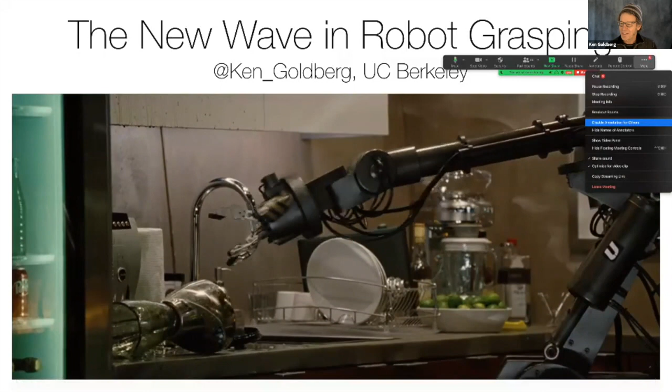Let's see, can you see the screen? Is the video moving? Uh-oh, now I'm worried something went wrong. No, I think everything is good, can you see it? Yes, everything works. Okay, great, fine. All right, thank you guys, thank you for being here.

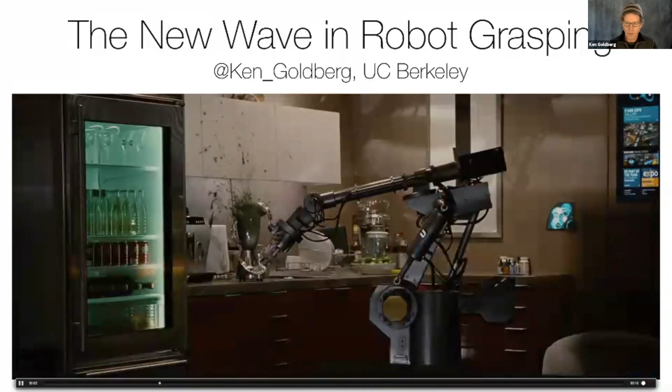So what I want to cover today is what I call the new wave in robot grasping. I always like to start with this video clip from Iron Man, and Animesh and other students have said over the years that this was a big inspiration for them to get interested in robotics. I love this scene in particular because that's kind of exactly where we are right now. Robots are still incredibly clumsy.

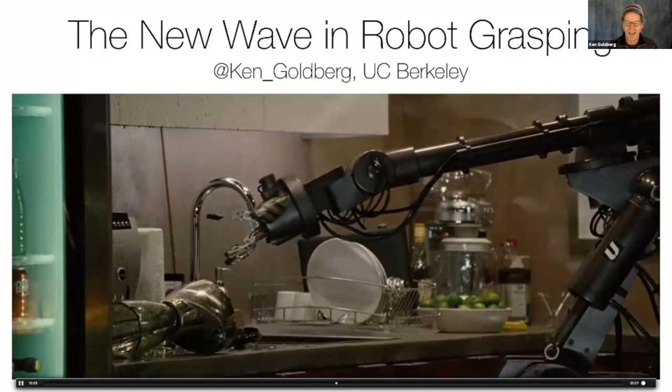So what I'll do is cover the new wave in the context of what I call the first, second, and then the new wave, and then also talk about some new projects that we're just submitting.

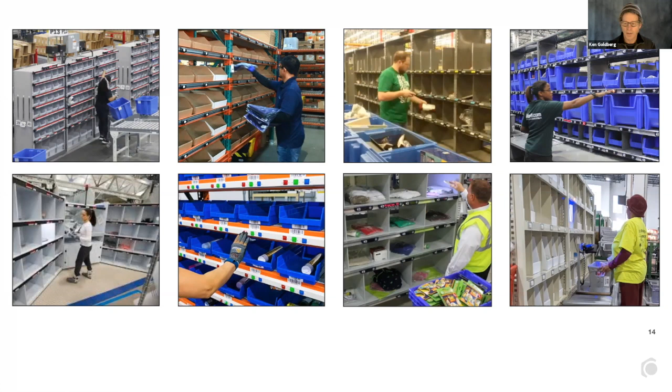Now, here's the challenge: what's behind the scenes when you order things, as most of you know, is that the orders have to be put together from these warehouses, and this is essentially a manual job. This is what it looks like in an Amazon warehouse.

And the other issue you're seeing here is the proximity. This year, because of COVID-19, people didn't want to work in these kinds of environments. They were too close, so they had to space the human workers out. So there was a real limited supply of workers and a massive increase in demand.

So the grand challenge, as Rod Brooks has put it very nicely, is that if robots could grasp arbitrary objects, anything you put in front of them, like you see here, this is what you see in a warehouse, if we could do this, it would have significant impact in factories, homes, and warehouses.

Now, let me address the issue of hardware for a moment. I know there's really interesting and exciting work going on in robot grasping with hand design, but I want to argue in favor of very simple hands.

This is the classic parallel jaw gripper. It's the workhorse of robot end effectors, and it can actually do almost anything.

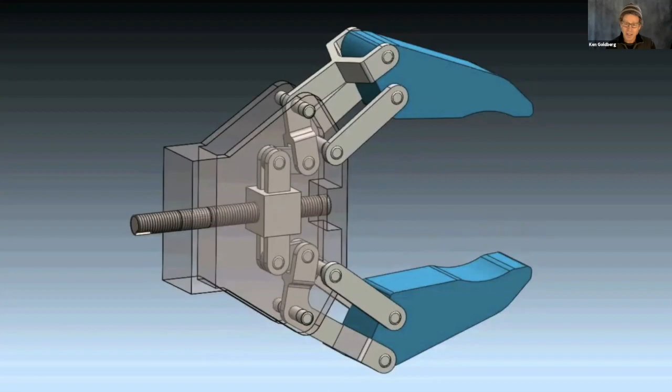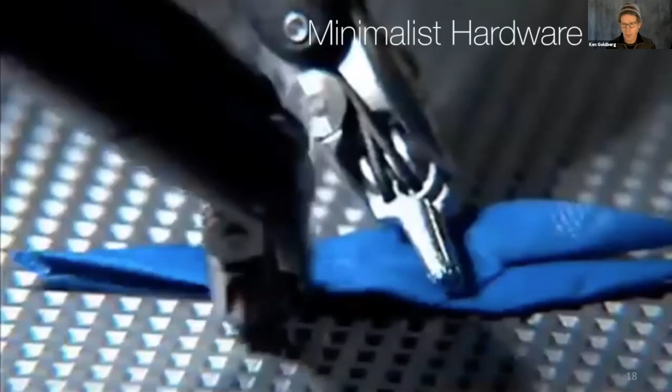...irregularly shaped objects. Now, another thing I want to talk about is sensing. A big change in the last decade is in depth sensing, and as you know, LiDAR has had an enormous effect on work in self-driving vehicles.

It's also being used in this problem of warehouse grasping. And I just want to point out that it is an important advance, but it's not a silver bullet.

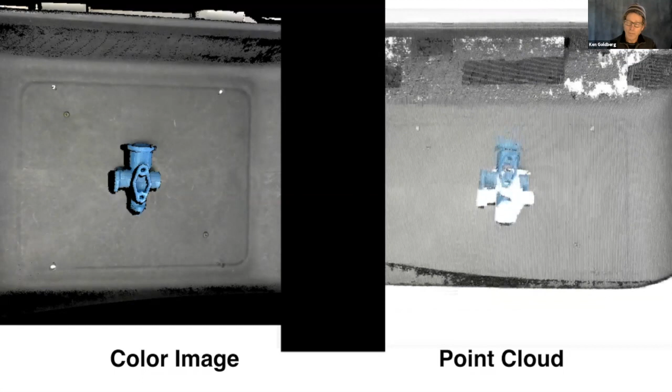So if you look at the image on the right, I just want to show you that the point clouds you get out of a typical depth sensor are not perfect. There are gaps and holes, and this is due to the light not reflecting in the way that it might be expected. This is exaggerated when there are areas of high curvature, transparencies, or specularities in metallic objects.

So that's a big problem and something we have to overcome. Another problem is the physics. So let me illustrate that.

This is due to the uncertainty in the underlying surface friction. I would even say it's non-stationary, because as you're pushing the object, it encounters different aspects of the surface friction. This is a very, very minute change.

Just a grain of sand under there will cause a dramatic difference in the final orientation of the object. Now, I want to say that this is a hard problem. We can predict the motion of an asteroid a million miles away far better than we can predict the motion of pushing an object across a table.

In fact, I would even go so far as to say this is an undecidable problem. Knowing how the object is going to react is not something that with better information we can resolve. It's aleatory uncertainty. It is undecidable.

Okay, so with all that, this is the challenge: we want robots to come in and clean up after a dinner party, but let me give you a sense of what it's like to be a robot.

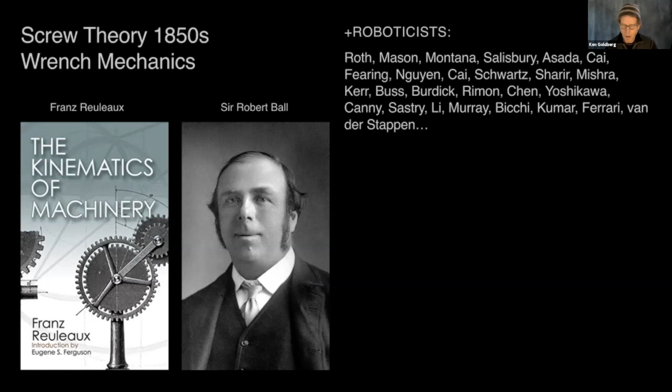What I call the first wave was really very consistent with Plato. It starts with axioms and tries to deduce models of reality. This goes all the way back to the 1850s, even further, with the great mechanicians who were designing clocks and other devices and had to understand the kinematics of machinery, wrench mechanics, etc. Many roboticists followed in their footsteps to develop analogous models for robots. I had the good fortune to work with Ruzena Bajcsy and Shankar Sastry, who wrote the foundational textbook on robot manipulation, a wonderful book many of you are familiar with, that goes into great detail on these models. They're analytic methods that look at the placement of all the forces, torques, and surface normals, and then make a binary decision whether or not the object will be held securely.

So for some state of the contacts and the grippers, there is an outcome: either the object is immobilized or it is not. What we want to do is find a configuration of the contacts that will immobilize the object. That's what I'm showing with U star there.

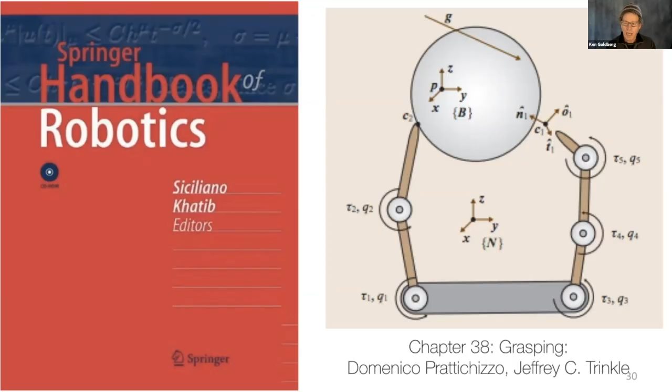Now, if you go into the Handbook of Robotics, the recent edition, there's a chapter on robot grasping. It's a great chapter, covers this very nicely, about 40 pages. If you get to the very end, you'll find a sentence: when a robot identifies an object to grasp, its knowledge of the object's pose and geometry are not perfect. This is only mentioned at the very end of the 40-page chapter. I consider this one of the greatest understatements of all time. This is such a huge matter, but it's totally not considered until the very end.

And this is the uncertainty that I'm talking about. The first wave essentially ignores it. It says, we know everything, we know the exact precise shape of the object, we know where all the contacts are. That's what allows us to develop this beautiful mathematical machinery that can determine where things are. But that doesn't quite work.

We started developing a model to capture this uncertainty, and this was the beginning of Jeff Mahler's PhD thesis. He's contemporary with Animesh, and Animesh was involved in some of this work as well. We call it the Dexterity Network, for a reason I'll explain, or DexNet.

The idea is that there is uncertainty, so we're going to treat it in a statistical way. We're going to consider all these variables as random variables, and now we have a graphical model where we can talk about the sources of uncertainty. We have distributions around the true pose of the object, the shape of the object, where the gripper contacts are, which will be determined by the gripper and the shape. The surface normals will be determined by that. The center of mass is also not known precisely. The frictional coefficients are not known and they're changing. All this leads to uncertainty in the precise forces and torques on the object, which will affect whether or not a particular commanded grasp will be successful.

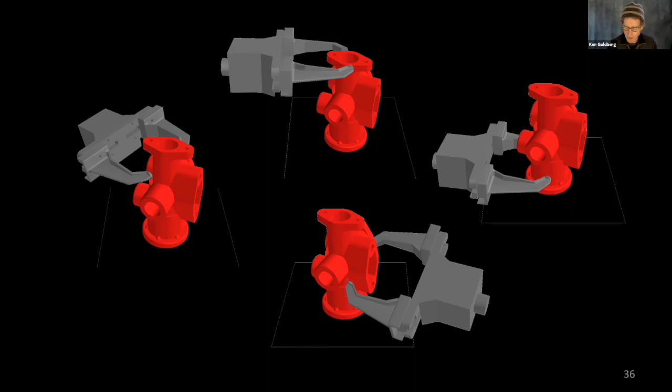What I mean by that is shown here. I have a nominal grasp, and what I'm doing is starting to look at small perturbations on that grasp and sampling from these distributions. So I'm varying the pose of the object, the pose of the gripper, the center of mass, and all of these variables.

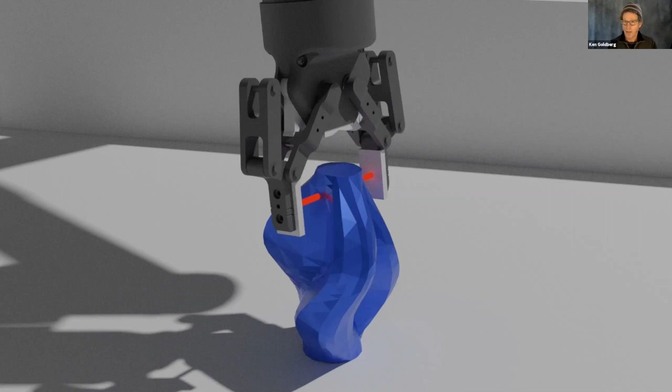For each one, I'm checking whether it will succeed, using classic wrench mechanics. So I'm not throwing that away, I'm using it, but in a stochastic model. We check across a number of samples, and basically do a version of Monte Carlo integration to estimate the probability of success for a particular nominal grasp.

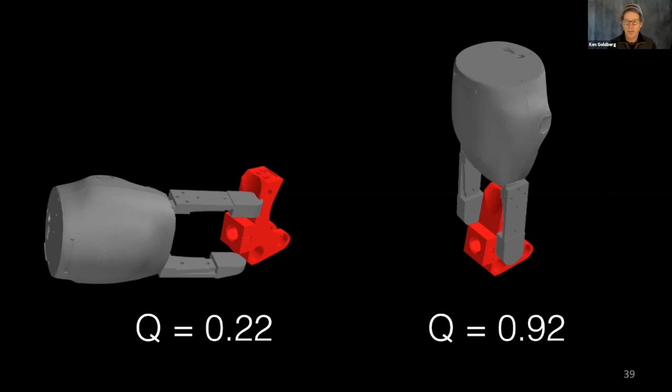So the outcome might be something like this, where on the left we have a very low probability of success, and on the right a very high probability of success. Hopefully that's intuitive, because the one on the left is such that a very small error will cause the part to move away, whereas the one on the right is almost self-aligning. It tends to close in and scoop up the part even if there's small uncertainty, so that's why it has a high probability of success.

We implemented this in what we call DexNet 1.0. The idea was we took images using depth cameras, estimated the state of the pose of the object, that's X, and then applied the Monte Carlo analysis to find the best grasp, the one with the highest probability of success. Let me show you it working.

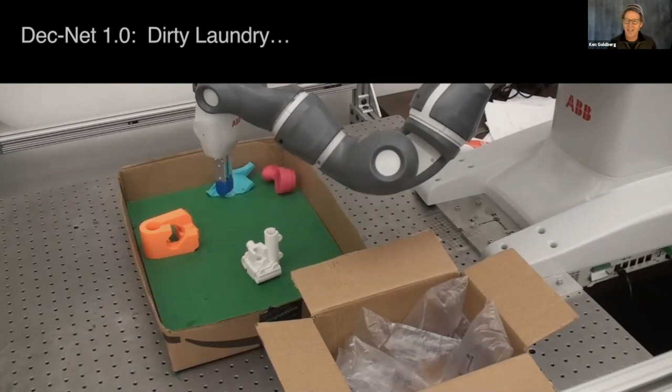So not so much. All right, what happened? Well, the problem here is that it computed a beautiful, robust grasp, but the state was wrong. It thinks the object was in a different configuration, and it executes a perfectly robust grasp, but for the wrong state. So this does not always work.

And the issue is perception uncertainty. Now we have another issue we really want to model. Remember, we started with the 3D camera image and used that to estimate state, but we have to learn a better way to do that, more systematically. So now, given an observation Y, which is a point cloud or depth map, I want to plan the grasp that will maximize the robustness, or probability of success. This leads us to the second wave, where uncertainty in perception comes in.

This is where the distinction between Plato and Aristotle comes back, because Aristotle was arguing in favor of a different approach to making progress in the world: to look at all the plants and animals and rocks and minerals and build up models from data. His point was collect data, and that is essentially the root of the contemporary wave in artificial intelligence, deep learning. It's data driven, and it's been extremely successful.

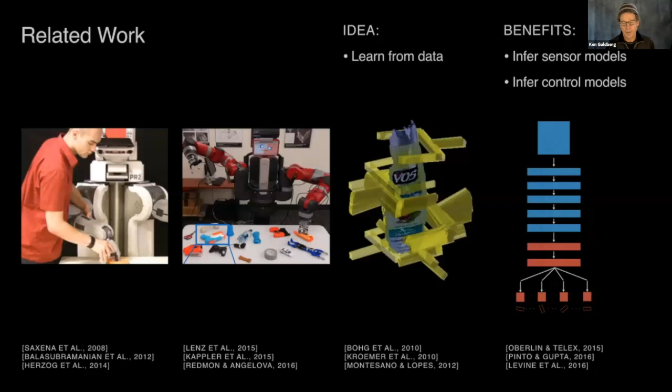A number of researchers have been applying that to robot grasping, and it's accelerated over the last decade. One of the most natural sources is to look at real examples, to learn from experience in the real world. These can be either human labeled or self-supervised.

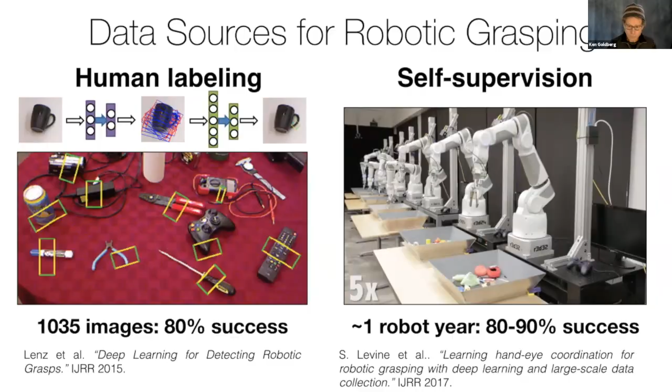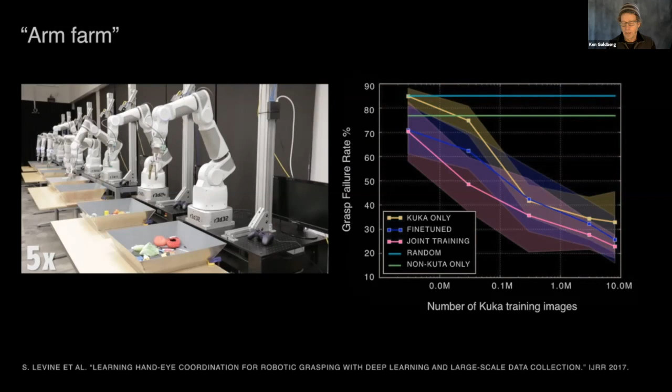You're probably familiar with the arm farm at Google that set up 14 robots to work around the clock to acquire data on grasping. One thing I want to point out is that in the published results, as it learns, this is a learning curve, it's able to reduce the failure rate, as shown on the right. But if you look closely, on this log scale, after about 10 million observations or examples, the system is at about 20% failure rate.

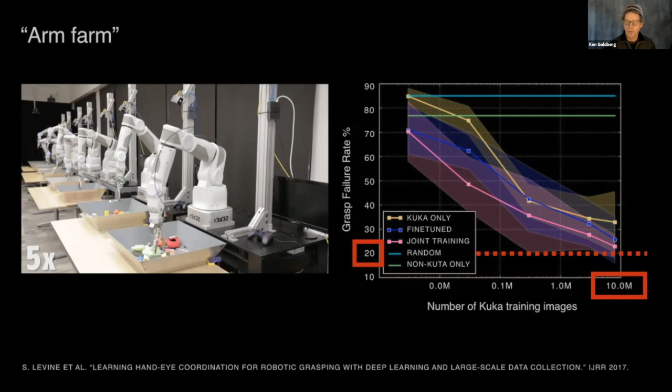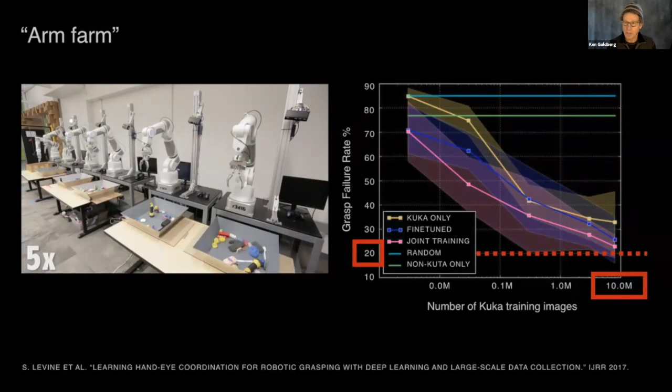If you try to extrapolate, it looks like at 10 million, that's a year's worth of round-the-clock data collection. So if you want to get down to 90%, you're going to need another 10 years of data collection. And if you want to drive it down to 95%, you might be looking at 100 years. So my point is that with this approach, the system, by collecting data, needs a great amount of data. Now, speaking of data, let's look at the example of computer vision.

ImageNet was the big example. It was a huge breakthrough. Fei-Fei Li and her colleagues developed this ImageNet, this data set of millions and millions of images, but they were hand labeled, drawing bounding boxes around objects and then labeling what those objects were.

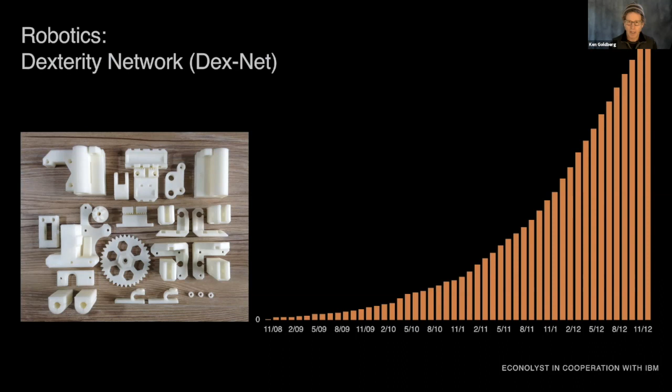So I'm curious, my hypothesis is, could we do something similar with robotics? Instead of ImageNet, we'll call it DexNet. The idea is to come up with lots of labeled examples. In this case, we're labeling them not with a name of an object like a necktie, but labeling the objects with robust grasps that we're pre-computing.

This is the analogy: can we generate a very large data set that would get us to a critical mass where we could start to see the system generalizing to new objects. In the same way that ImageNet reached a critical mass, once you had that, you could learn a very large neural model, a convolutional neural net, that would then be able to generalize to new examples.

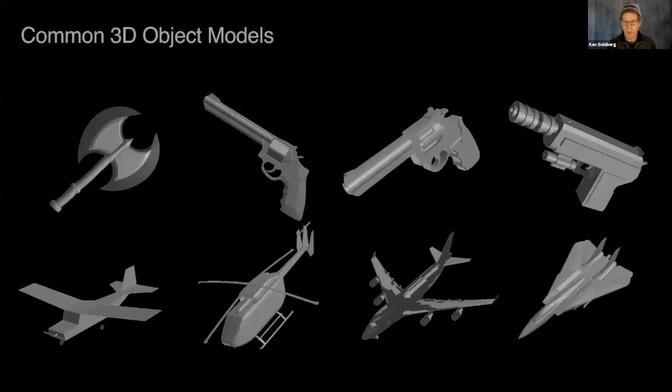So we set out to do this, and the good news is that there's a lot of 3D models out there. One reason is that a lot of people are publishing 3D models for gaming. So when you look out there, you'll find lots and lots of weapons and aircraft. We have plenty of those, but those are not very commonly found in warehouses.

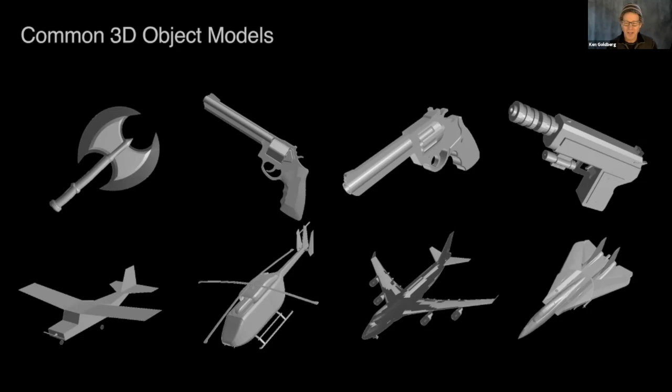So we had to go out and really curate a data set of three-dimensional objects that were more natural in, let's say, warehouse and home environments. So we found objects like these. We cleaned them up, made them watertight so that the surface normal properties are correct, made them into regular solids, etc., and scaled them by a number of factors. This was a fairly long process.

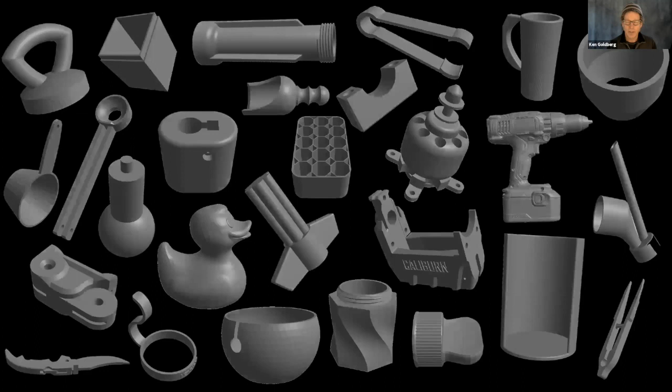We also augmented the data with blister packs. This is very common in warehousing and retail, where you have objects attached to a piece of cardboard. So it's very easy to add that piece of planar surface onto the object and then use that as a new object.

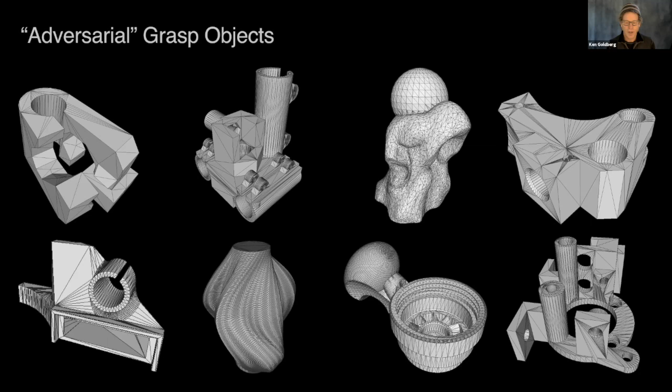We also looked at what we call adversarial objects. This, again, is somewhat inspired by work going on in adversarial computer vision, where they come up with examples that are very difficult. Here we wanted to find objects that were difficult to grasp, not obvious. So it took some time to find these kind of objects, but we've been collecting them.

And then we put them together into a big network because we want to understand relationships between them. So this leads us to the new wave, and I want to do a quick shout out.

To a book that came out this year. It's called How to Train Your Robot, and it's available for free online on my webpage. My daughter Blooma is the first author. She's a very good negotiator—she wanted to make sure she was first author on this book. It really tells the story about getting kids interested in robots.

There's a scene in there that basically tells the story about DexNet learning how to grasp objects. In particular, trying to explain it to kids, we came up with the analogy that it's like the robot was dreaming about how to grasp objects. And that's how it learned—in other words, not doing it physically, but dreaming about it.

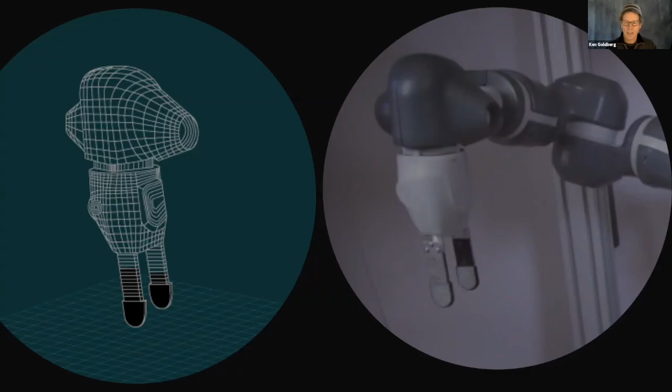So what I want to say is that the important distinction here is that we're now performing the grasps in simulation and then learning from many of the simulated examples rather than doing them with real robots.

So that can actually be parallelized very nicely. We did that—we put it on AWS and spread them out. Then you could actually do this kind of computation overnight. Now, we also wanted to speed it up a little bit.

Now, just a quick detour here. We found a fun idea, which was to use multi-arm bandits to bootstrap this. The idea is to make use of similarity between objects and between grasps. There's this idea of correlated bandits, and the key idea is you first have to identify when you have two similar objects.

So we built a network to do that, building on this new, at that time, idea of multi-view deep convolutional neural nets, where you take a lot of synthetic views of an object and train a network to identify the object from different views and cluster those views together as a similar object. That worked very well.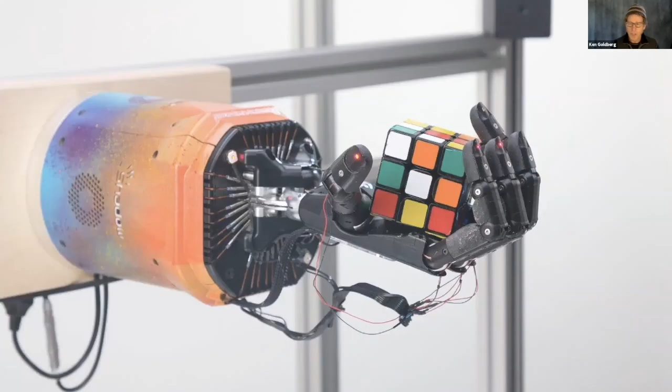Now you may be familiar with the advance from OpenAI - they developed the shadow hand robot performing and manipulating a Rubik's Cube. As you know, it's a very extensive process using simulation like we have been doing. They also adopted a technique we've been doing, which they call domain randomization. This is exactly what we talked about earlier - they want to randomize the system and give it lots of variation. This is essentially a key trick to crossing what you might call the reality gap from sim to real.

So the idea is you have to inject noise. You have to make the system robust in simulation if it has any hope of working in reality. We do this in terms of both the control and the sensing. So we generate 3D depth maps and inject noise into them that's consistent with the noise properties of the cameras we use - not just random noise. I really believe in structured domain randomization, where the noise you inject actually has the properties of your real system, your real sensors, and your real controllers. What we get out of that is a data set.

This is the set where you have combinations of an input image Y, a grasp configuration U, and R, the estimate of the robustness of that grasp. Those triplets are generated, and using the cloud, they can be generated fairly quickly, giving you millions of examples - both positive examples, grasps with a high probability of success, and negative examples, grasps that don't succeed. Then we take all that data and train a deep network, tuning the parameters in this large vector theta to minimize the loss between its output and the outputs measured in the data set.

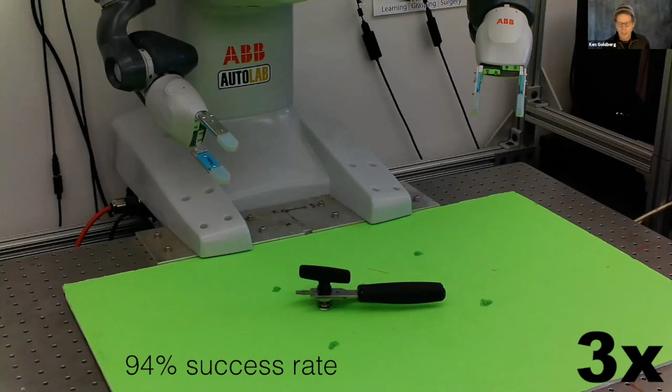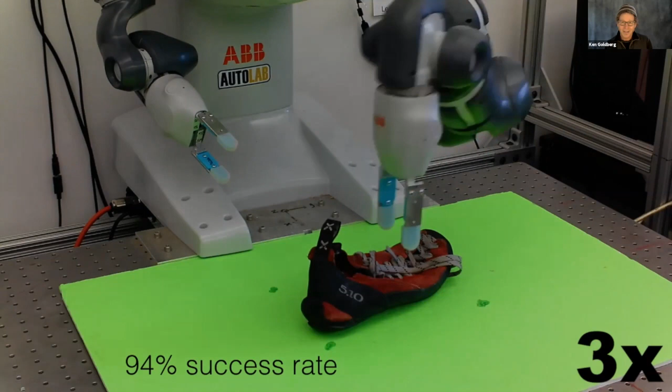It was very surprising, and I have to say this: when Jeff called me into the lab and said, look at how well this is doing, I was surprised. These are objects it was not trained on, and it actually performs surprisingly well.

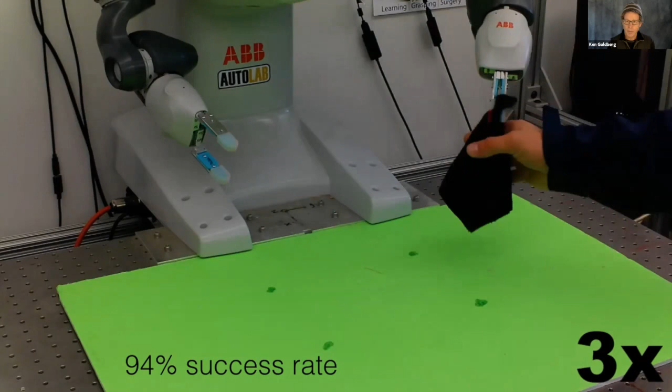And by the way, all the objects it was trained on were rigid, so it's starting to pick up things that were non-rigid. So it was generalizing very well, and that got us very excited.

So the next thing Jeff did was extend it to bin picking, which is a notoriously difficult problem, where not only do you not have just one object in isolation, but you have a heap of objects in a bin. What he did was the same thing: train it on synthetic bins. Again, like dreaming, not about picking up one object, but dreaming about bins and picking up objects out of bins. You could train it very analogously.

So this is the output. On the left, you see the color image. Next, you see the image of all the candidate grasps that it selected, and then it's iterating, basically feeding those through the network to choose better ones using cross entropy to optimize. On the right, it finds the grasp it believes has the highest probability of success in that cluttered bin.

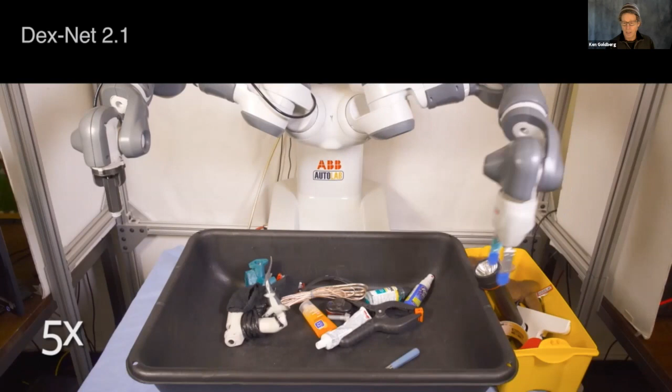And so here we go. Now it's actually working in bins, and we call this Dex-Net 2.1, and it's able to pick things up. Again, none of these have been trained on. They're all novel objects, and some of them are deformable.

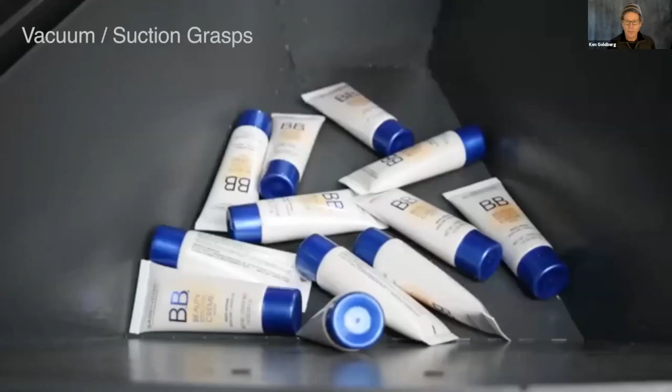So we released this. We got some really nice coverage in the press, and companies started to approach us about incorporating it. One of the things they pointed out was that they use a different kind of gripper, the suction cup. And remember, I was making a big point about simplicity - we were always using the parallel jaw gripper, which has two contacts. Well, the suction cup only has one.

So it turns out that's what we call unicontact grasping, and we just hadn't really considered that. So we started looking into it, and we were surprised that there was very little literature on unicontact grasping and suction cups.

In other words, to really model the physics, analogous to the beautiful literature we had found for contact with parallel jaw or multi-fingered hands. It may be out there - we still haven't found it. So if some of you are aware of it, please share it with us. But we started to develop our own.

So the first step was to try to model the physics of the vacuum cup itself and the seal of the vacuum, which had to do with the local surface geometry. Generally it's not planar, so you have to look at how much it varies from planar, and then look at the conformation of the suction cup.

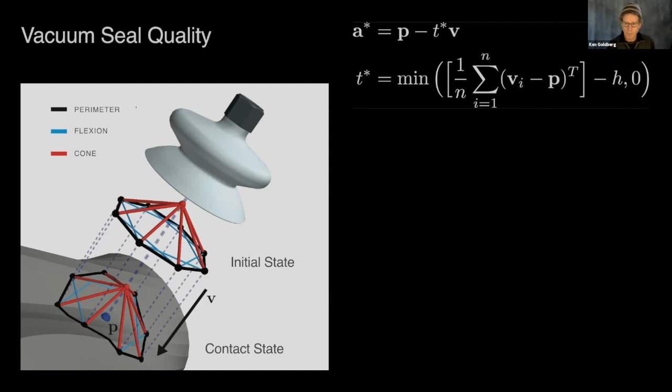And then you also have to think about a new model of the wrench mechanics, because suction cups are different than finger joints or contact between two jaws - here you have the ability to resist forces orthogonal to the suction, but actually very poor ability to resist torques that will peel the suction cup off. So we had to model all that, and then once we had that, we have a new analytic model, and we can train on lots and lots of synthetic examples.

So as you see on the left is a candidate suction grasp point on this object. We look at all the perturbations, just as we did with parallel jaw grippers, and on the right it's computed a map of the robustness of different contact points for the suction cup. It makes intuitive sense that these points in green are better places to put your suction cup - they have higher probability of a successful grasp.

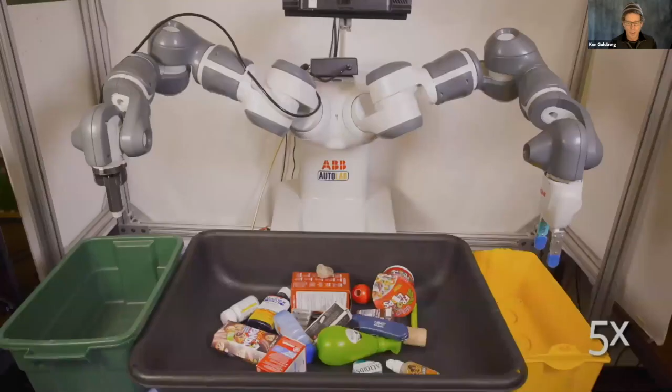And in a bin, again, we did this in the bin context as well - it's looking for points that have a high probability of success for a suction grasp. And then we put these together. We call this ambidextrous, where the robot has two different kinds of grippers: a suction cup on one hand and the parallel jaw gripper on the other. The suction cup can pick up a lot of objects, as you see here, but now we want to have them both working.

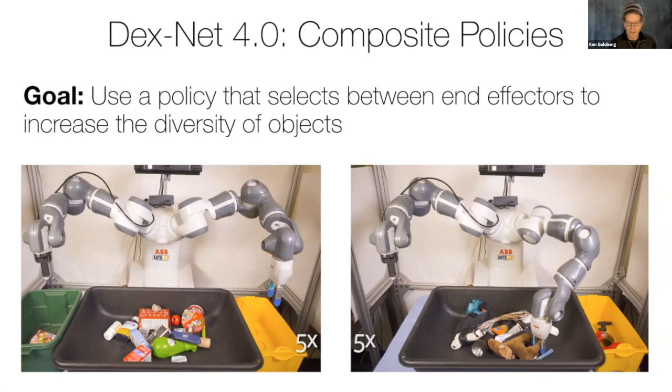So we call this composite policies that use both of these two modalities. And the key there is to put them into a common reward function, because you have to normalize these estimates.

That took a little bit of time, but basically you can see on the left, this is characterizing the grasp axes that will determine the probability of success. And on the right, the suction probabilities and how probable they are. Then we can essentially at any given time make a decision which of the two modalities has the higher probability and execute that one.

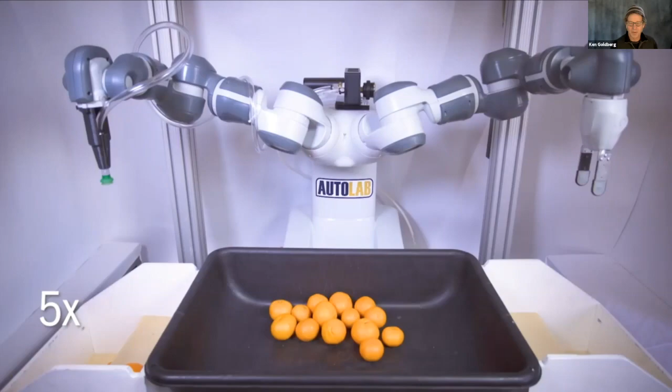So now the suction is trying to pick up things, and the gripper is trying to pick up what it thinks it can. And it doesn't always work. So the suction can't see that this object is porous, but then it knows to be able to send over the parallel jaw gripper.

This has been very, very fun to watch this evolve. We have a paper on this in Science Robotics, looking at this ambidextrous model.

But we have also started a company, and so Jeff and three other students in the lab co-founded Ambidextrous Robotics, and our motto is getting a grip on reality. We're actually coming out of stealth mode at the end of this month. So if you're interested in learning more about that, please get in touch with me.

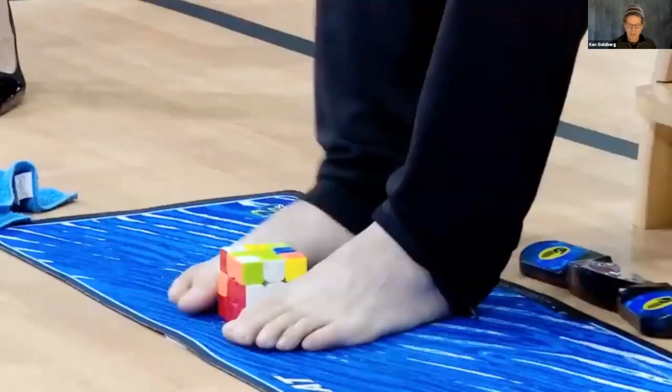And so we're making progress, but there's still many more open research problems. By the way, if anyone really doubts that robots are going to take over and that humans are doomed, I'm not worried about that. As you can see here, human manipulation abilities are quite impressive.

Okay, so now I'll just touch on a couple new projects, and then we'll open up for questions. I'm really curious to hear questions from you.

New projects, well, we have another paper that came out in November, and this is Jeff Ichnowski's work. He's a postdoc, and he's been working on the second problem, which is once you have the object grasped, how do you move it very rapidly into a new location? It turns out that you want to do that with minimal jerk motions, but computing the minimal jerk motion is prohibitively time consuming, so you actually spend more time computing the minimal jerk than you save in performing it.

But he was able to try something really exciting where he could generate lots of examples, again in simulation, and then use that to build a neural network to estimate the minimum jerk trajectory. That then provides a warm start for an analytic method that actually optimizes, and that turned out to give a dramatic speedup. So what used to take on the order of 10 or 20 seconds, he got down to 80 milliseconds, so it's now practical for industry.

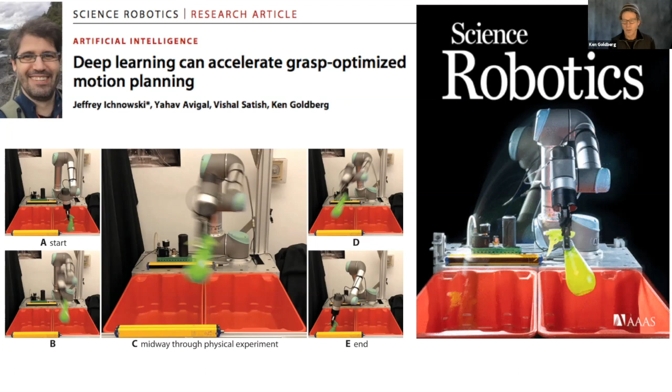Another project I'm excited about has actually been led by two undergrads, Jennifer and Priya, who are tackling the problem of untangling cables. This is a real problem in many homes, certainly, but also in a lot of industrial environments and repair shops and in boating, etc. And it turns out there's some really nice theory out there for essentially how to model knots, but it's essentially graphical. So the trick is, how do we then get to the graph?

It's actually a surgical arm, picking up and basically loosening and untying these kinds of knots. We're also looking at dynamic cables. We were inspired by one of my favorite movies, Raiders of the Lost Ark, and we have a paper at ICRA in May that we're calling Robots of the Lost Arc.

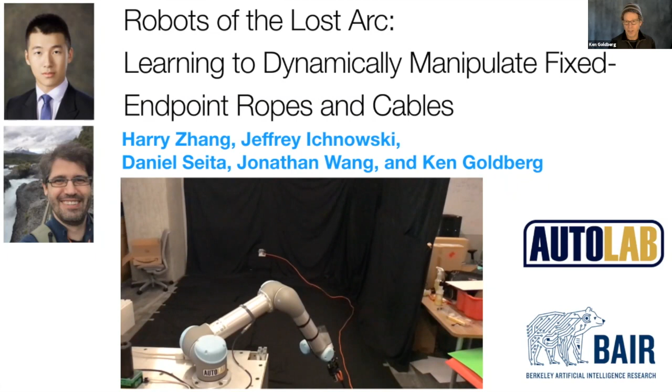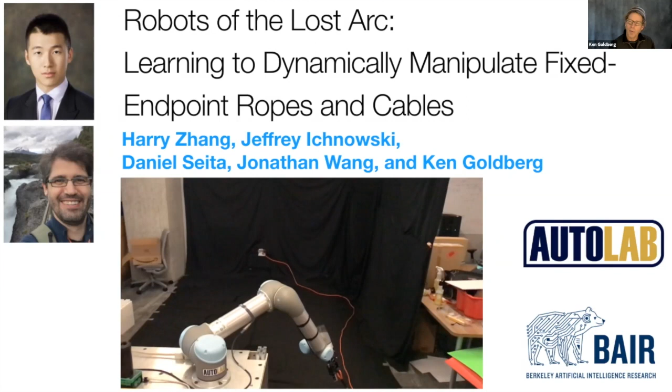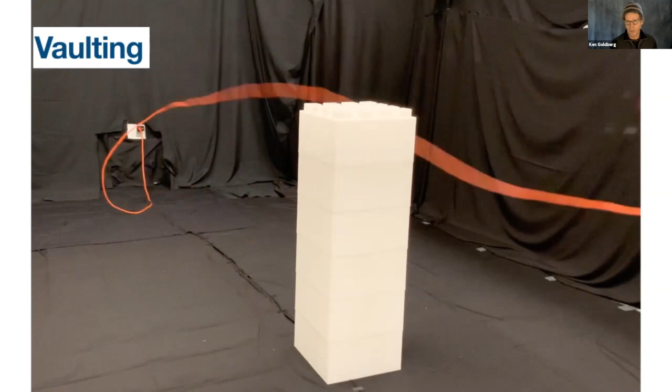The idea is to manipulate fixed endpoint cables. Imagine you're vacuuming and the power cord gets stuck, and you have to flip it to get around a chair. People do this all the time, but can we get a robot to do it? We want the robot to perform tasks like vaulting over an obstacle. We also look at knocking, where we place an object on an obstacle and want it knocked over, or weaving, which arranges the cable between multiple obstacles.

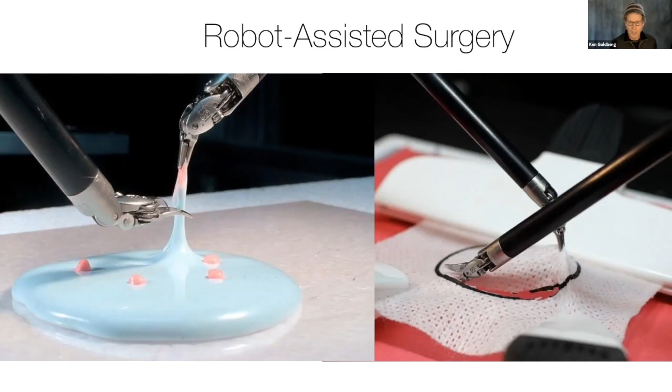We're also working on robot-assisted surgery, and Animesh did a lot of this work when he was in the lab, and it's ongoing. We're looking at things like debridement, especially in environments that may be deformable, as mentioned earlier. We have a Da Vinci robot arm in the lab that we use regularly for experiments.

Wonderful, thank you Ken for such a great talk. I think it covered so many bases, algorithms, very interesting choice of tasks, clearly. Manipulation is clearly this wide open world with many interesting problems.